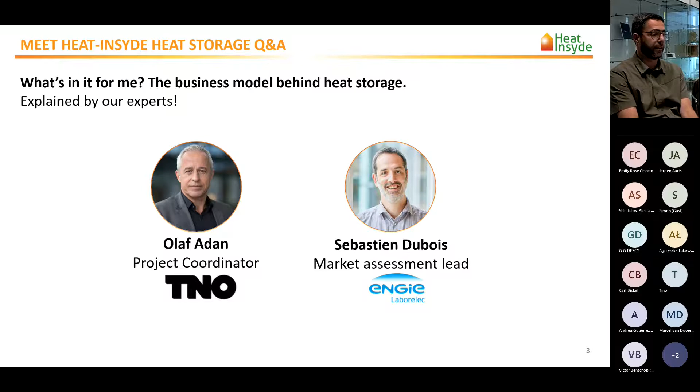With me today are Olaf Adan, the project coordinator of HEAT-INSYDE, and Sébastien Dubois, market assessment lead at ENGIE Laborelec. Quickly about their resume: Olaf is a principal scientist at TNO and a professor in applied physics at TUE. Last year, together with other colleagues, he co-founded Cellcius BV, the company that will be the market vehicle of the heat battery. He has been working on heat storage for more than 10 years, and as mentioned, is the HEAT-INSYDE coordinator, and he has a very long track record in EU projects.

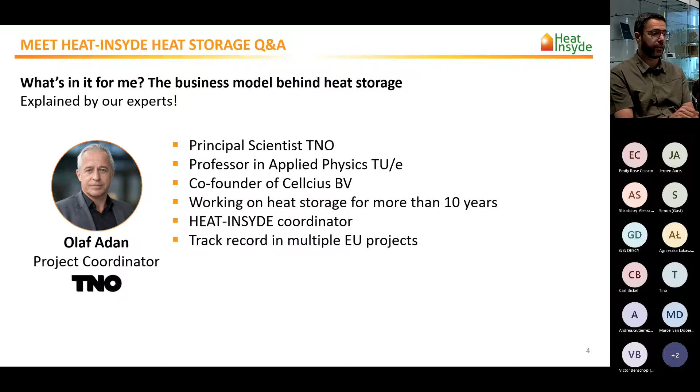Sébastien Dubois, our colleague from ENGIE Laborelec, is a project manager in thermal processes, and he has 13 years of working experience on waste heat recovery, biomass valorization, and energy circularity, and is an expert in new technologies evaluation and integration. He will say a bit about this activity during the presentation. Within HEAT-INSYDE he is work package leader on technology and market assessment, and like Olaf, he was involved in several collaborative projects with the European Union. I think we are ready to start, and I will give the word to our first speaker, Olaf Adan.

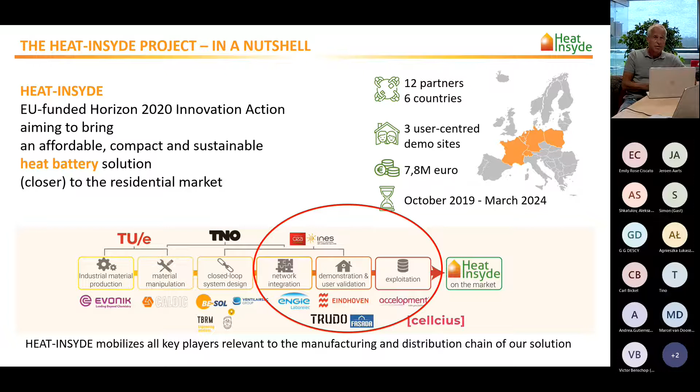Thank you, Francisco. For those who don't know HEAT-INSYDE, it's my pleasure to give a very brief introduction into the project. HEAT-INSYDE is a European project funded in the Horizon 2020 program. It's an innovation action, aiming to bring an affordable, compact, and sustainable heat battery solution closer to the residential market. What is a heat battery? A heat battery is a storage device that can be charged by heat and/or electricity, and delivers heat at temperature levels suitable for domestic applications, to take a shower or to heat your house.

It's a European project bringing together 12 partners from 6 different countries in Europe. As the key issue in the Horizon 2020 program is to bring technology closer to the market, we have included 3 user-centered demonstration sites: one in the Netherlands, one in the south of France, and one in Poland. The project is sized 7.8 million euro; we started in October 2019 and will run until March 2024, so we are presently more than halfway.

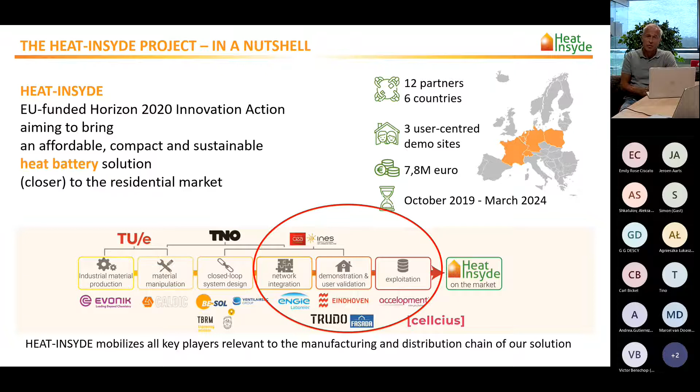To achieve the goals, HEAT-INSYDE mobilizes all the key players in the manufacturing and distribution chain. We have 3 players forming the knowledge backbone: Eindhoven University of Technology, TNO, and CEA. And we have players covering the entire chain, from the industrial production of the material, the design of the hardware, the integration into the system, to communication, exploitation, and the players that bring in the market perspective. Today we will focus on the market perspective, business models and market analysis, and Sébastien will go into that more deeply.

Where are we now? We didn't start from scratch. In 2019, TNO and Eindhoven University of Technology built the first 7 kilowatt-hour demonstrator, which really proves the technology. Nowadays we have arrived at a prototype somewhat comparable in size, but already 200 kilowatt hours in capacity. The key thing is its modular design, making it possible to apply the system at completely different scale levels in completely different applications.

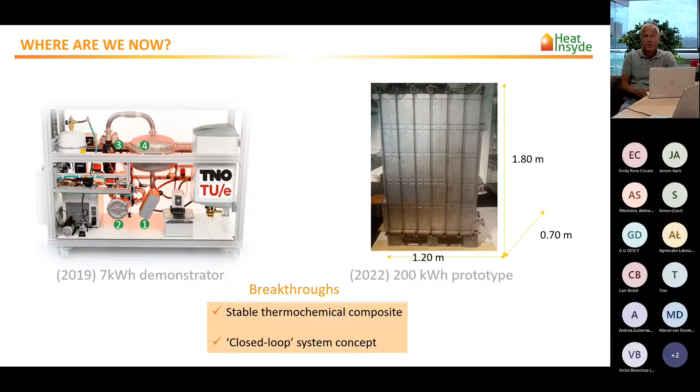The starting points were 2 main breakthroughs. First, the development of a very stable thermochemical composite, a material capable of containing a lot of energy lossless, and that's a key thing. Secondly, a completely new device based on the closed loop system principle. So, the unique selling points: first, the storage of energy is really loss-free, which basically faces no competitor on the market.

Secondly, it's a very compact solution, and talking in terms of energy density, it's much more compact than water. Of course, time is playing a crucial role in that. Thirdly, it's basically affordable. We're using very cheap ingredients. It's much cheaper than electric domestic batteries.

Fourth, it has an excellent footprint, starting with the basic material that we're using, which is based on potassium carbonate, which is easily recyclable, and the device also has been designed for easy reuse. And last but not least, and despite the fact that we are just talking about the heat battery, it also has the inherent feature of doing the same thing for cooling.

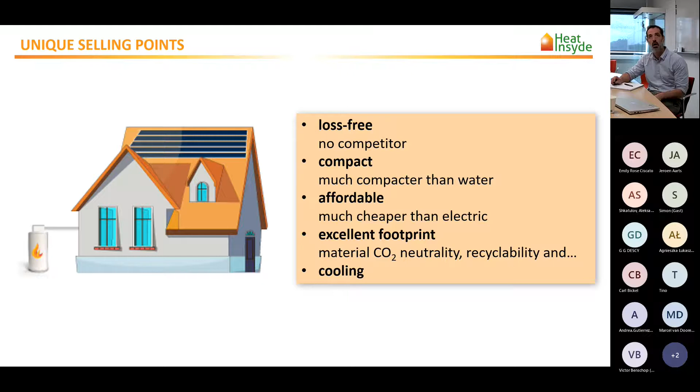So this is in brief what the project is all about, and I'm passing over to Sébastien, who's going to elaborate on the market analysis. Yes, thank you for the introduction, and hello to everybody. So let's start with a bit of technical explanation.

So first, in heat storage systems, we have to distinguish, I would say, two big families. There are solutions of heat to heat. So on the left side of this slide, this is the heat storage system that everyone knows, basically, where we store heat when we have an excess of production, or when we have a low heat price available, and then we release the heat as is when we have the heat demand or a time slot where the heat price could be higher.

On the other hand, we have also other kinds of systems which are categorized in the power to heat application. Meaning that here the idea is to recover renewable electricity at periods where the electricity cannot be used, and then we use this electricity to store heat in a heat tank, and we deliver the heat at periods of time where we need it.

So of course heat storage is always about the dissociation between the production and the use of the heat. So it makes no sense to store heat when you use it, and the opposite. It could also be used to smooth load variation. Typically in district heating, we use heat storage tanks to divide, I would say, the operation of a heating system like a boiler and the grid, where all the customers can ask for a certain heat load at different periods of time, and then we use a kind of buffer there.

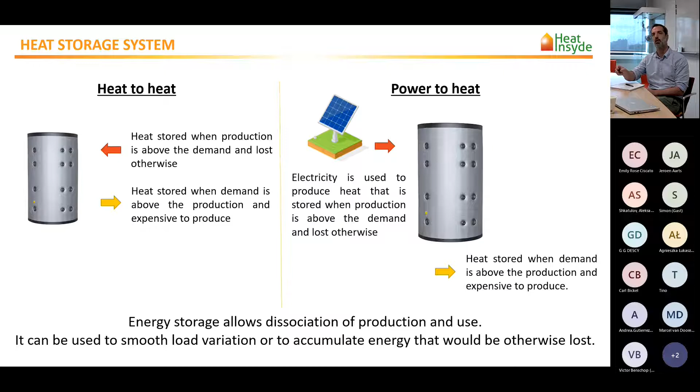And then through the 20th century, the technology was improved, and we tried to make them more complex, or at least make them multi-energy systems, to arrive at the fourth generation, which is not existing yet, but this is the future of district heating. The most important thing to remember for this fourth generation is the level of the temperature inside the district heating, which is much lower than initially.

So before, the typical temperature was about 90 degrees C, and for the next generation of district heating, we are speaking more about 55 degrees C as hot temperature and 25 at the return. Another interesting point to mention is the number of technologies involved to provide the heat in this kind of system. It should be understood like the electricity grid, where we have electricity providers and electricity consumers. For this kind of district heating, this is exactly the same philosophy. So you have heat providers and heat consumers.

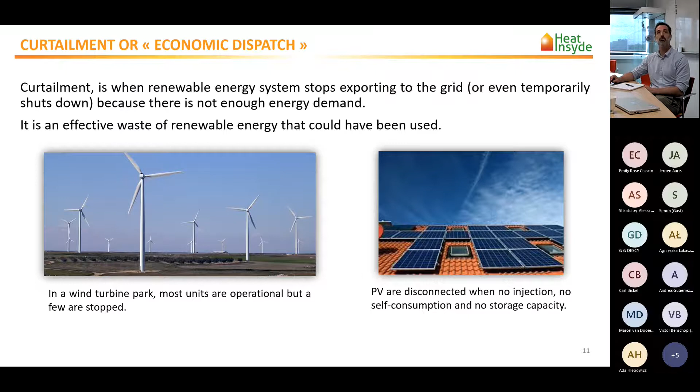And then in the energy market, there are different strategies to valorize this curtailment, so the not produced energy, but we could use this in the future. So there is of course different scales: there is the grid level and the local energy community level. The grid level, of course, is linked to very high power capacity. So it's very interesting, for instance, to produce hydrogen.

And then you can see different kinds of projects over Europe aiming at developing the hydrogen capacity. And this is mainly to deal with renewable energy curtailment. So instead of not producing or discarding this kind of energy, we will produce hydrogen, and hydrogen is a long-term chemical storage and should be understood as such.

At the local energy community scale, the goal is to maximize the self-consumption of a given energy community. So it means that in your neighborhood or inside your quarter in a city, the goal would be to maximize the self-consumption of renewable energy, so you avoid consuming energy from the grid. There, it makes sense to think about alternative solutions, because hydrogen requires a lot of power that is not available at the local energy community scale. So there alternative solutions could be interesting.

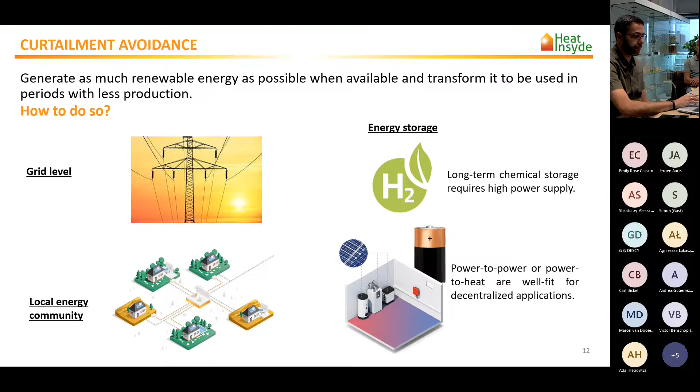For the first question, one we received most often: Olaf, when is the heat battery going to reach the market? Well, that's a good question, because the question is underlining our sincere belief that it is going to be brought to the market. I think that first of all, we of course have to prove the success and understand the client much more, and that's part of the running project HEAT-INSYDE. We already have a vehicle in place to bring our technology to the market.

So that means that after the project finalization mid-2024, we will start focusing on industrial upscaling, so the industrial production of the systems that we foresee. And having in mind that the usual time to market is somewhere between 5 to 10 years, we expect that somewhere between 2025 and 2030, the first individual heat batteries will be launched to the market.